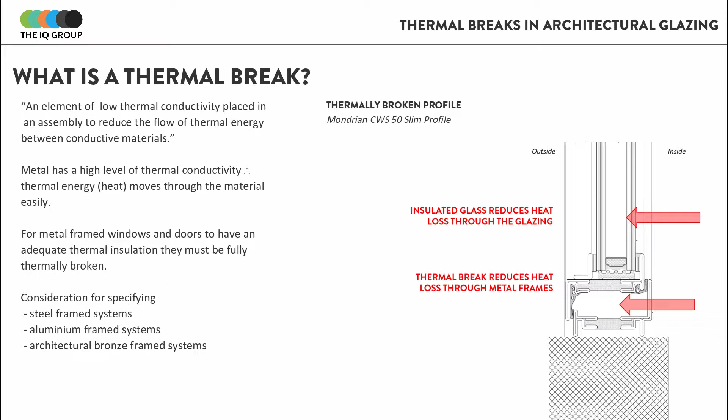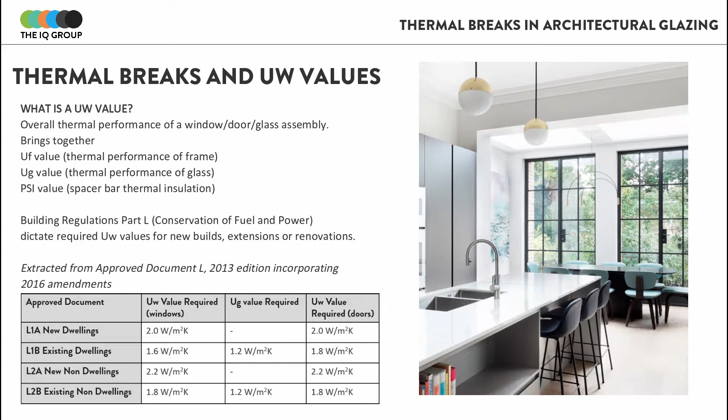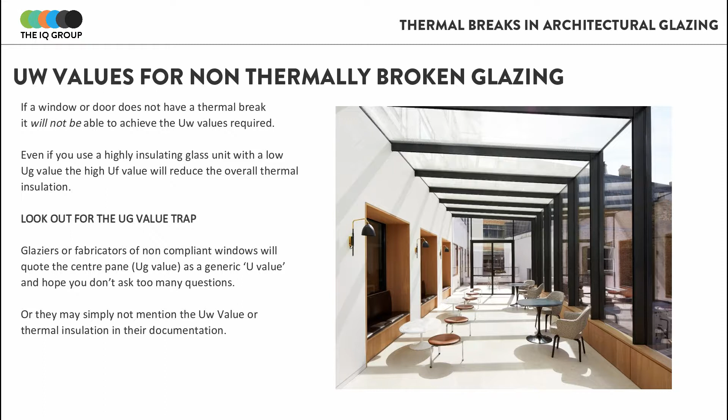By understanding how a UW value is calculated, it's easy to see then that if the thermal performance of the frame is low, because you've used a non-thermally broken profile, it will affect the overall thermal performance of the installation. You should always make sure that the U value that you're quoted by the glazier or supplier is the actual UW value for the installation. Because sometimes if a system is non-thermally broken or not very well insulating, some more disreputable sources may quote the UG value as the U value. This can obviously be misleading for specifiers who want to know what the overall thermal performance is, so it's important to get clarification as to what values you are being told.

It isn't just the technical thermal aspects of a building that will be affected by using non-thermally broken profiles. If non-thermally broken systems are used between inside and outside, then the internal piece of frame in that system will be very cold. This is a prime surface for condensation to build up internally. That can then damage internal building finishes or soft furnishings like carpets or curtains. If it's very cold outside, you could even experience a frost build-up on the inside of a window or door. This is why it's so important to use a true thermally broken system to separate two different climates.

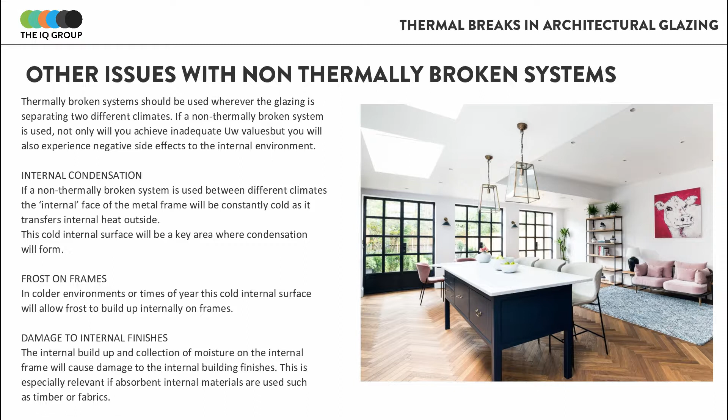So let's have a look at some real systems and the effect that their thermal breaks have on their thermal performance. This first system shown here is an aluminium system from the Sieger range, aptly named the Sieger Slim window. It has an overall depth of 70 millimeters and a vent plus framing profile of 65 millimeters. This is very slim for an aluminium system. You can see from the U value breakdown how the UG value and the UF value come together to offer a typical UW value of approximately 1.2 watts per meter squared Kelvin.

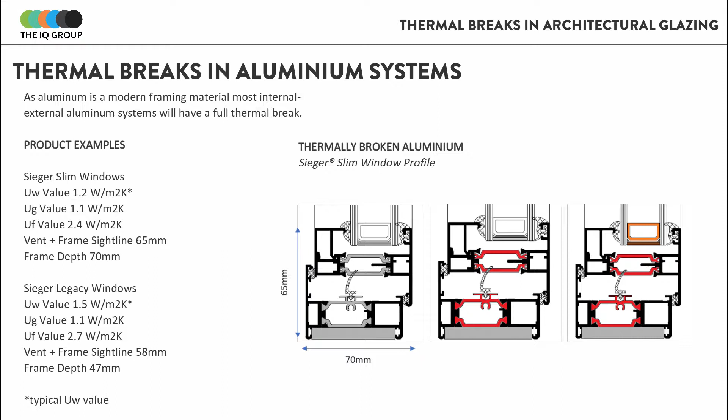An alternative option in aluminium is the Sieger steel look system called Sieger Legacy. This is useful for projects looking to create a more industrial steel look, but with an aluminium frame. The sightlines here achieved are 58mm across both the fixed frame and the vent frame, and this is in keeping with the visual design of a more traditional steel system. The reduced depth of 47mm also makes it a little bit more suitable for older buildings or replacement glazing.

Again, you can see when you look at the UW value breakdown that the shallower thermal break used in the Legacy system, highlighted in red, doesn't offer as much thermal insulation in the frame as the one shown previously, and this results in a higher UF value and then results in a higher UW value. You're normally looking at a UW of 1.5 watts per meter squared Kelvin for the Sieger Legacy system like shown here.

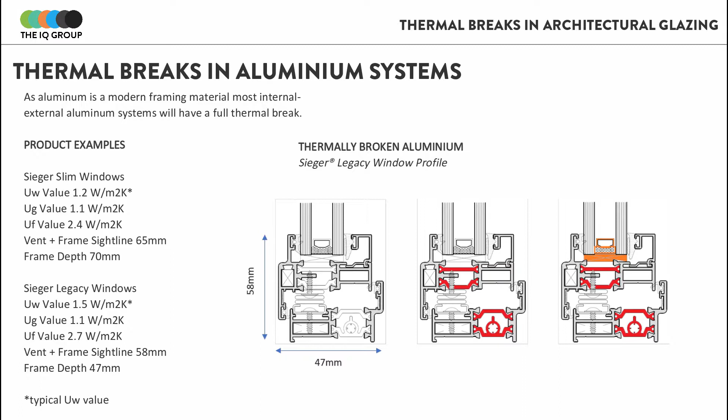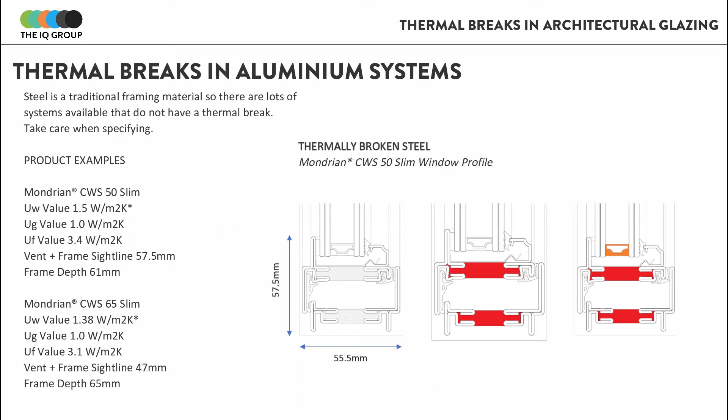Now we have a look at some steel systems. The profile shown here is the CWS 50 Slim system from the Mondrian range. This has a thermal break, it's highlighted in red, and you can expect to achieve a UW value of approximately 1.5 watts per meter squared Kelvin for a very typical installation.

For better thermal insulation in a steel frame, the Mondrian CWS 65 Slim system uses a slightly different thermal break material which reduces the UF value and therefore gives you a slightly better overall thermal performance. You would normally be looking at UW values from about 1.4 watts per meter squared Kelvin with this type of thermally broken steel system.

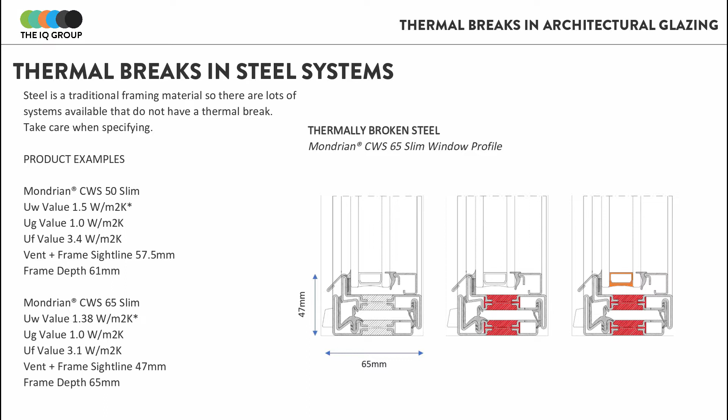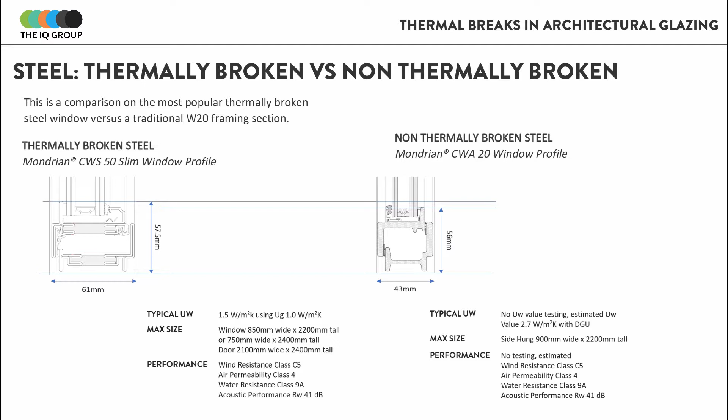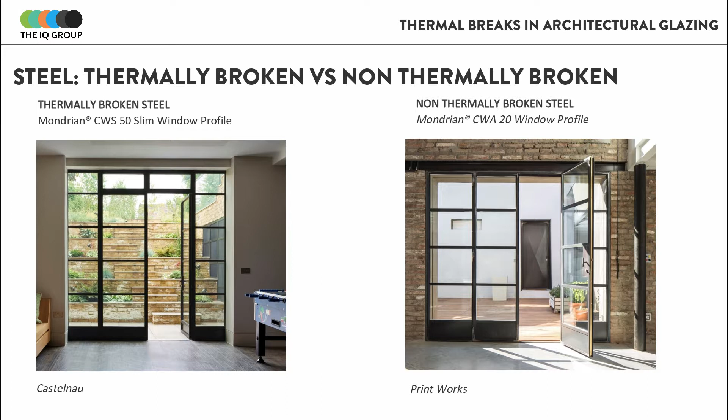This is a visual comparison of the two systems. On the left, you can see the thermally broken steel solution using Mondrian profiles in a Belgium door configuration, and on the right is a very similar door configuration using a non-thermally broken solution. You can see that the visual design is almost identical.

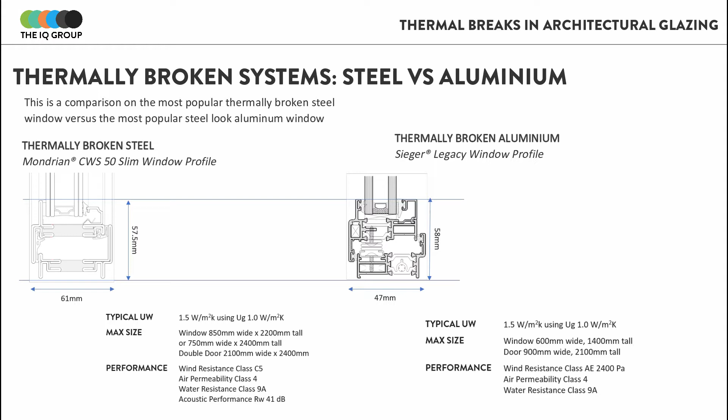Here you can see the Sieger Legacy system, the steel look system from Sieger, compared with the Mondrian CWS 50 Slim system, which is a thermally broken steel solution. You can see that the sightline difference between these two steel and aluminium systems is very small. The Sieger steel look aluminium option is only 0.5mm bigger in sightline than the alternative steel solution.

Again, let's have a look at a visual comparison of the two systems, and you can see that there isn't really a huge visual difference between the thermally broken steel and the thermally broken aluminium system. The main visual differences between an aluminium and a steel system tend to be at the corner joints, which you can only see in very close-up environments. In steel systems, these corner joints are welded and smooth. In aluminium systems, these joints are mitered and cleated.

This then leaves a very faint visible joint at the corners, which you can see if you look at the system very close up. Other than that, the design is very similar from both systems. This can then allow you to achieve the more industrial artisan design wanted for the project, even with a reduced budget.

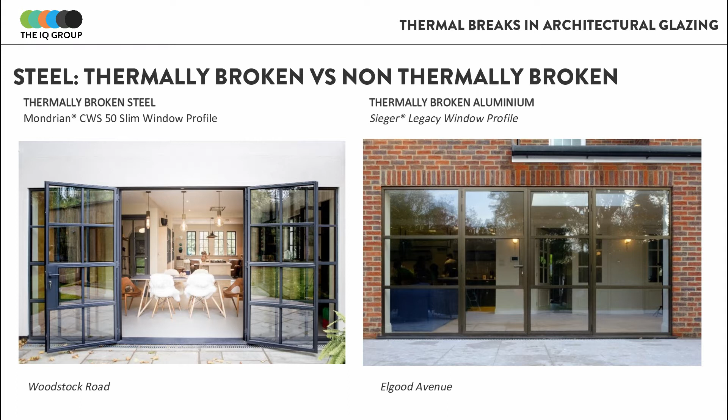So that is the end of this webinar. We hope that you found it useful and that it has helped you to gain an understanding as to why thermal breaks are so important in metal framing, and also has given you some ideas of the options that are available to you on your project.